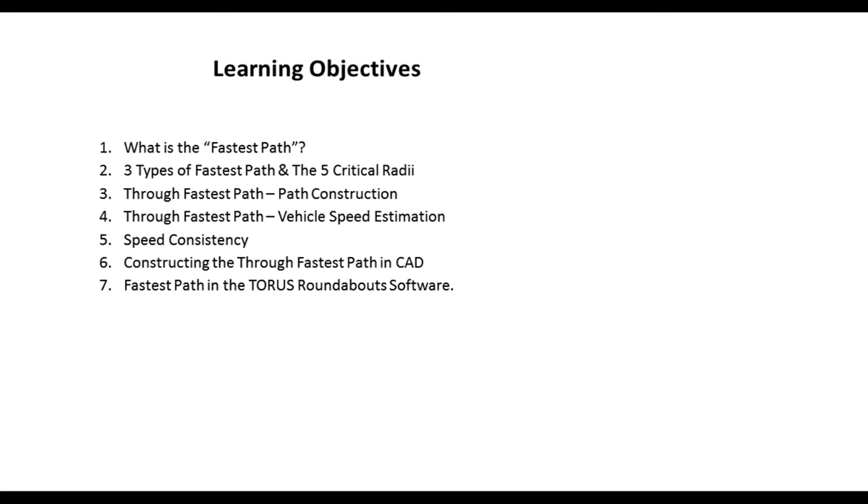At last, I will show you the workflow that engineers and designers use to create the fastest path and speeds manually step by step. Then my colleague is going to demonstrate the TORUS Roundabout design software in terms of creating the fastest path and calculating speeds.

Well-designed modern roundabouts usually bring advantages over intersections. For instance, improved capacity and safety for drivers, pedestrians, and cyclists. The geometry at entry, circulatory, and exit of roundabouts is important to assess the speeds at the roundabout. And the fastest path analysis estimates the speeds along the vehicle path.

The fastest path is the smoothest, flattest path possible for a single vehicle in the absence of other traffic and ignoring all lane markings. It's drawn for a vehicle passing through the entry, circulatory, and exit for all movements. The fastest path allowed by the geometry determines the negotiation speed for that particular movement into, through, and exiting the roundabout.

The design speed of the roundabout is also determined from the smallest radius along the fastest path, and usually the smallest radius occurs on the circulatory roadway when a vehicle turns to the left around the central island.

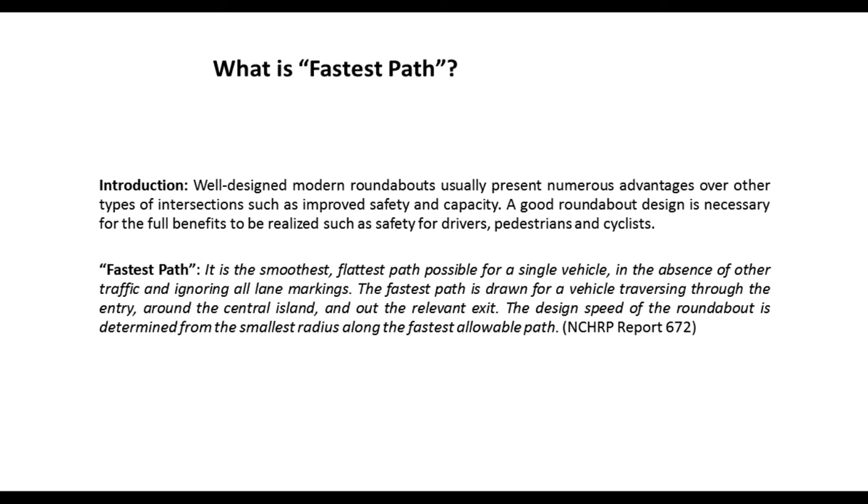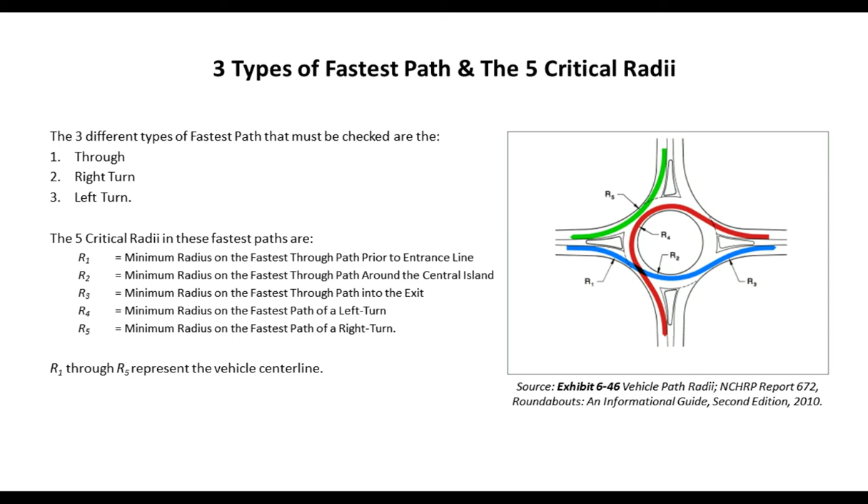This slide illustrates the three types of fastest paths, including through, right turn, and left turn movements. Also, the 5 critical radii that must be checked for each approach. R1 through R5 are minimum radii, which represent the vehicle center line in its fastest path through the roundabout.

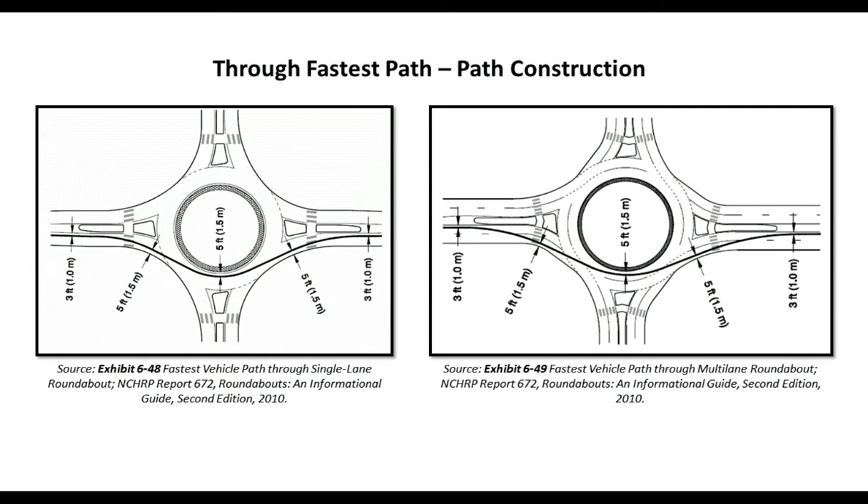The fastest paths must be drawn for all approaches and all movements, including left turn movements, which generally represent the slowest of the fastest paths, and also right turn movements, which may be faster than the through movements at some roundabouts.

For the through movements, the fastest path is a series of curves. To draw the path, a short tangent should be drawn between curves, which gives the driver time to turn the steering wheel. To measure the minimum radii, engineers use the curve template or replicate the path in CAD and try to define the radii based on their engineering judgment.

The entry path radius, R1, is a measure of deflection imposed on a vehicle before entering the roundabout. The construction of the fastest path should begin at least 165 feet or 50 meters before the entrance line or yield line by using the appropriate offset identified above.

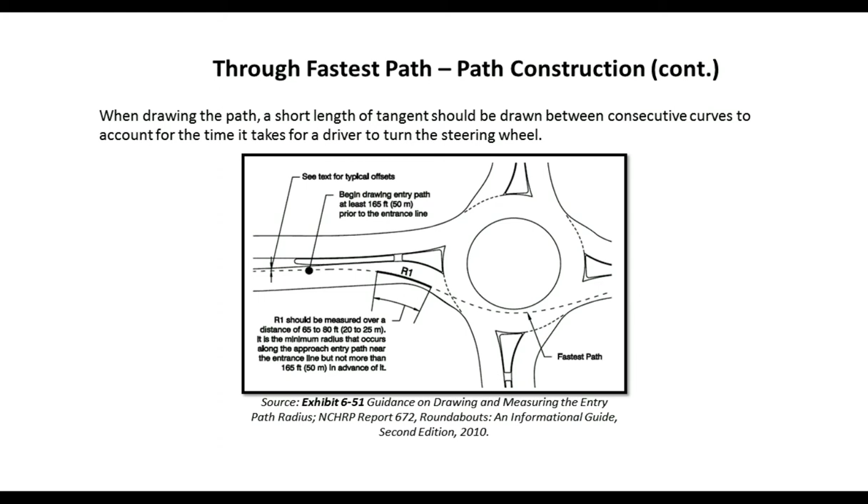For example, R1 should be measured at the smallest best fit circular curve, and the length of the arc should be at least 20 to 25 meters or 65 to 80 feet near the entrance line. After determining the radii, the relationship between travel speed and horizontal curvature is calculated with the following equations, which are useful for different superelevation values, positive and -2%.

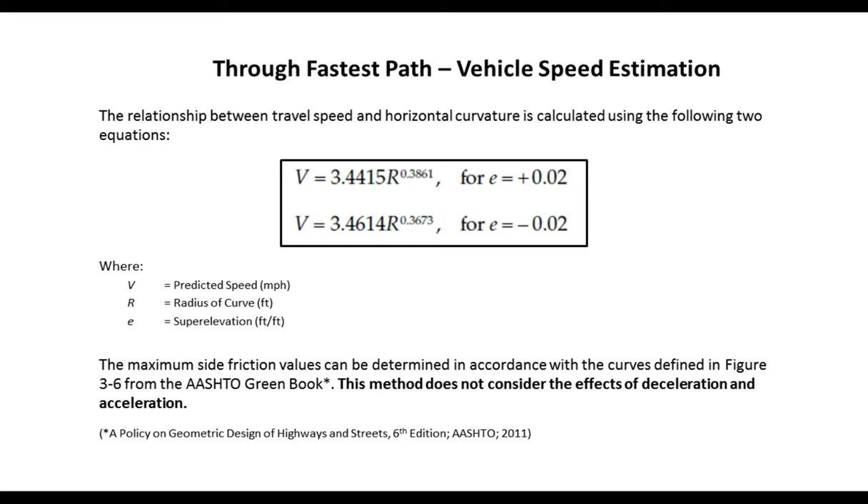As you can see, this method doesn't consider the effects of deceleration and acceleration. So for the cases where the path radii are large, it may overpredict speeds at the entry and exit. So to achieve better results for V1 and V3 calculation, I mean the entry and exit speed, two equations are recommended based on NCHRP 672.

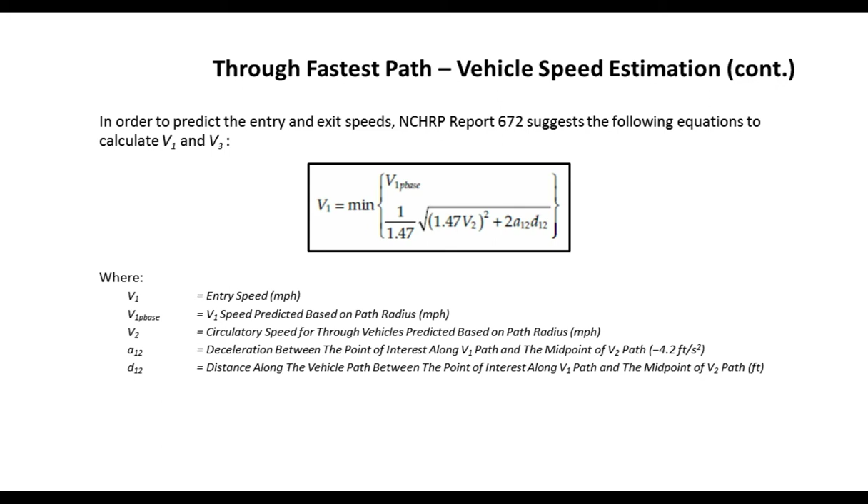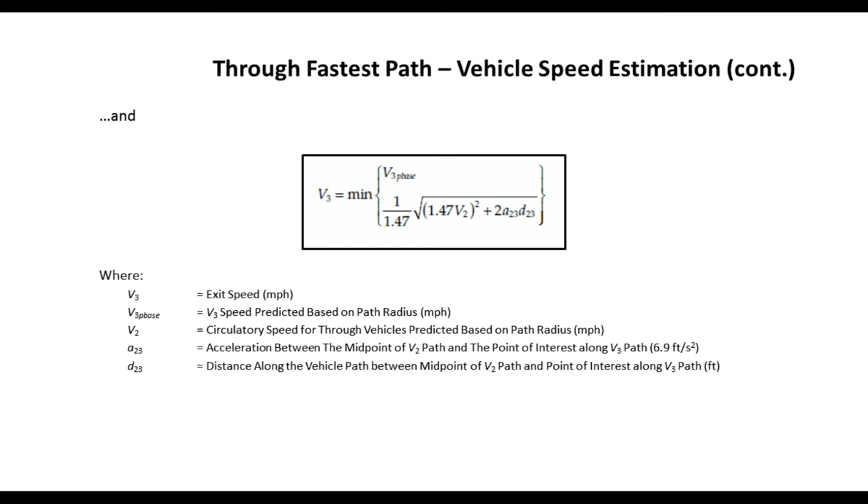In addition to achieving an appropriate design speed for the fastest movement, achieving consistent speed for all movements is another important objective for roundabout design. Speed consistency between the speeds of various movements can help to minimize the crash rates between conflicting traffic, so optimizing entry capacity. Relative speeds between conflicting traffic streams and between consecutive geometric elements should be minimized.

Based on NCHRP 672, the maximum speed differential between movements should be no more than approximately 10 to 15 mph or 15 to 25 km per hour. Also, based on FHWA, the value for R1 must be less than R2, and the value for R2 must be less than R3. This condition ensures that speeds will be reduced to the lowest level at the roundabout entry and will reduce the likelihood of loss of control crashes.

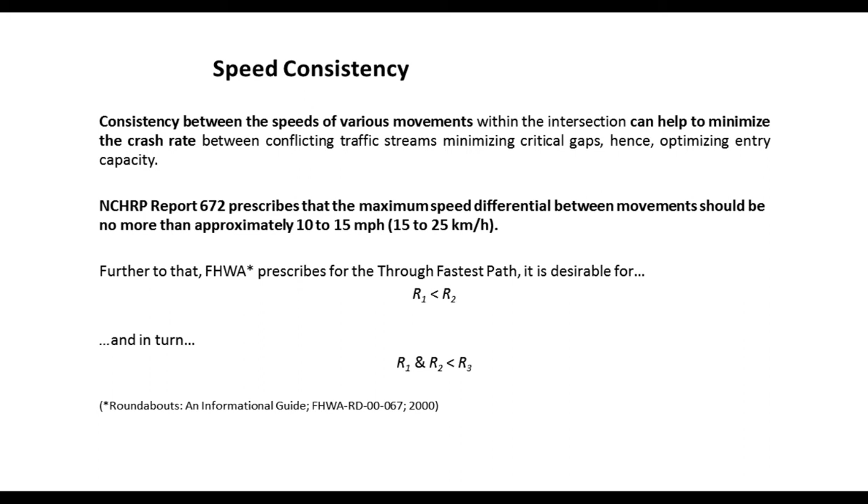Now, I would like to show you how we can create the fastest path and measure radii using CAD to calculate speed manually. Generally, the manual method has 4 main steps based on the Wisconsin Department of Transportation Roundabout Guide. First of all, we should create offsets for our roundabouts: 1 meter offsets from medians and 1.5 meters from the central island and corners, as you can see in this image.

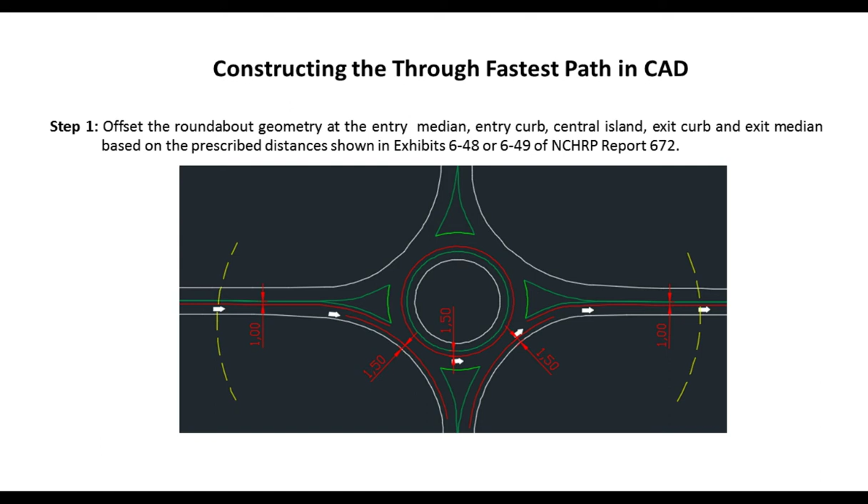Also, according to NCHRP 672, the fastest path must start at least 50 meters from the ICD. In the next step, we should draw a spline curve as shown in this slide for the through movement. To get a better result, we should select points A through C on the offset from the splitter island.

It is advisable to choose the first 2 points, I mean A and B, outside the 50 meter arc by about 8 meter intervals, and the last one, C, exactly on the 50 meter arc from the ICD. Next, we should choose point D close to the 1.5 meter offset from the entry curb. Then choose a location for the spline near the 1.5 meter offset from the central island.

After that, we need to select the position for point F close to the 1.5 meter offset from exit curb. For the last part, we should use the same approach which we used at the beginning of the vehicle path.

Choose point G on the exactly 50-meter distance from ICD and other 2 points after 50 meters by about 25 feet or 8-meter interval. Select another point which defines J in this image just upstream from the first point of the spline. To select the tangent direction from the drop-down menu as it is shown in this slide.

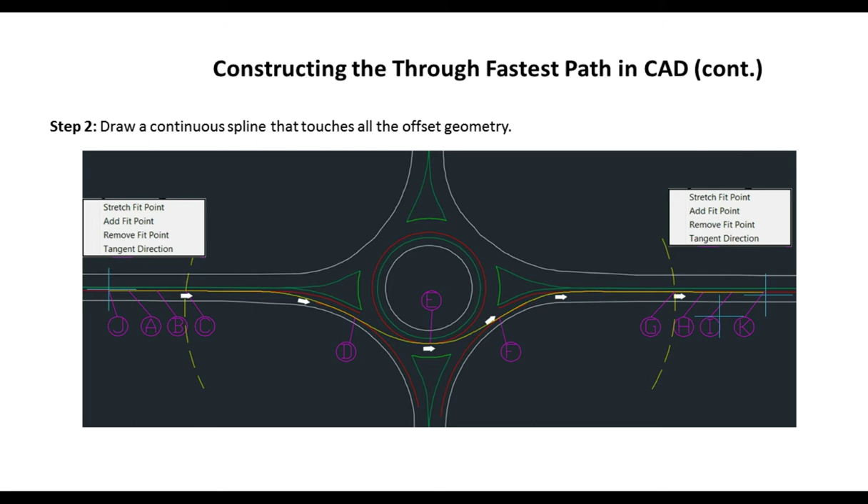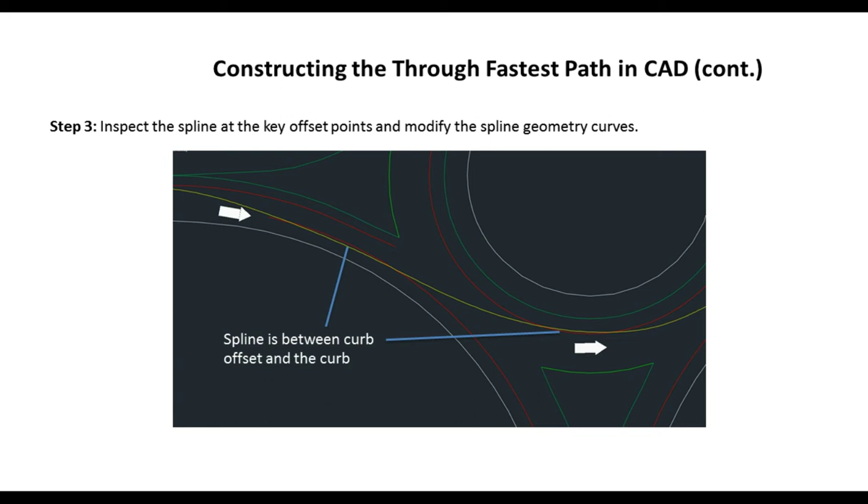This will force the spline to be tangent to the splitter island offset, and do the same thing for the end point by selecting another point named K in this picture. In the next step, we need to modify the spline, which was created in step 2, to see if it violates the offset. By zooming, we can visually inspect whether the spline curve violates the curb offset. If yes, we will need to modify it.

Once an acceptable spline is created, it is the time to measure our values by fitting arcs to the spline. Using nearest object snaps, fit an arc onto the spline at a point that appears to be the tightest portion of the spline. This should happen before the yield line and not more than 50 meters from the yield line. Then we should check the length of the arc, and if the arc is not 20 to 25 meters long, we should recreate it.

Then we can measure the radius of the arc. We must repeat this process to find R values for all movements. And after finding the values for R, we need to calculate speed for each R. Now I would like to show you these steps in CAD. So let me switch to the CAD.

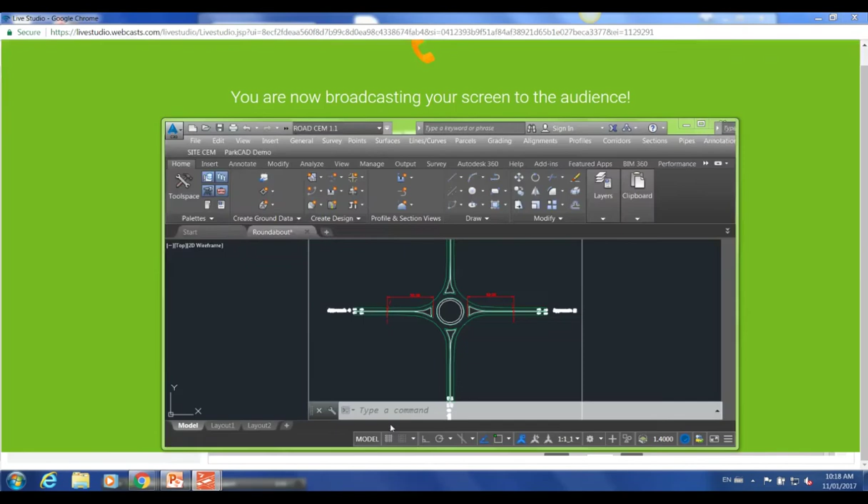Now at the moment, I would like to share my screen with you to show how we can create the fastest path in AutoCAD platform. It takes some seconds to show you. Thanks for being patient. I hope you can see my screen. If you have any trouble, let me know.

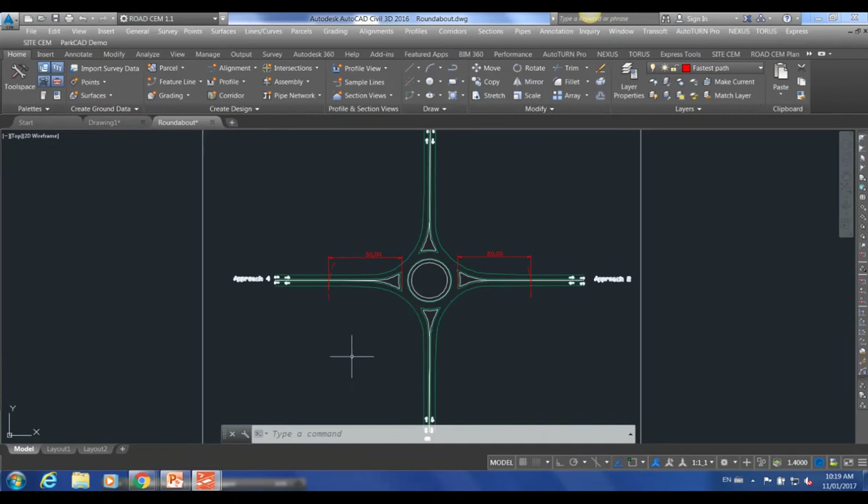Now, this is the CAD platform, and I would like to show you how we can create the fastest path and estimate the speed for this roundabout. This is a single lane roundabout with 4 legs, which I designed before in AutoCAD. And now I need to generate the through movement fastest path and estimate speed for entry, circulatory, and exit. First of all, I need to create the offset. 1 meter offset for splitter island, for entry and exit.

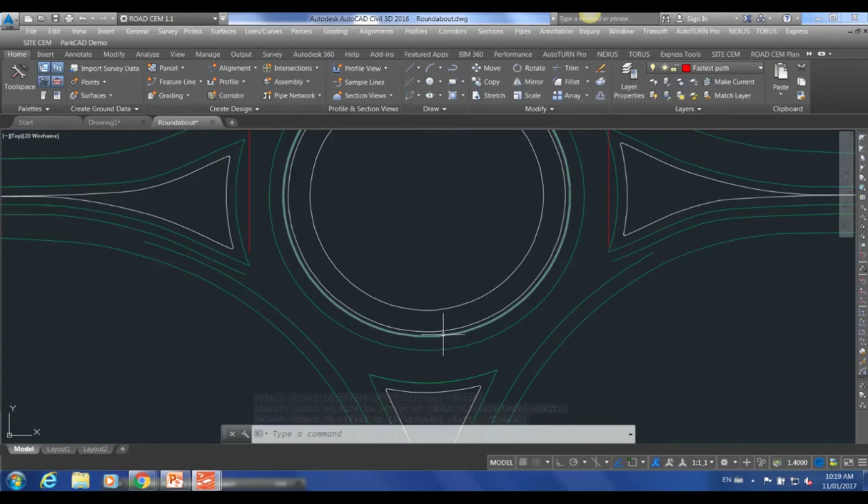And also 1.5 meters offset from the central island and also entry and exit corners according to NCHRP 672 methodologies. And also these 2 red arcs that we have here represent the 50-meter distance from ICD, which is important for us to create the fastest path and measure the radii, especially R1 and R3, I mean the entry radius and exit radius. And after that, I need to find the best fit spline to join all the offsets together to create the vehicle path.

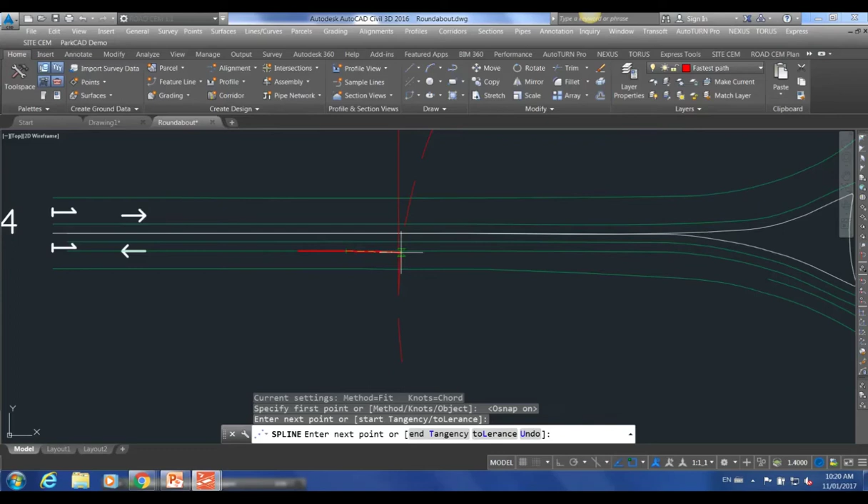Also, I need to turn on the snap and then select 1 point outside the 50-meter arc, the second point by 8-meter interval, and the third point exactly on the 50-meter. And then I need to continue along the offset. I try to select the segments very small, but as you know, this is a drawing example, and because of time, I just show you the methodology, but in a real drawing, we need to spend much time to get the best result.

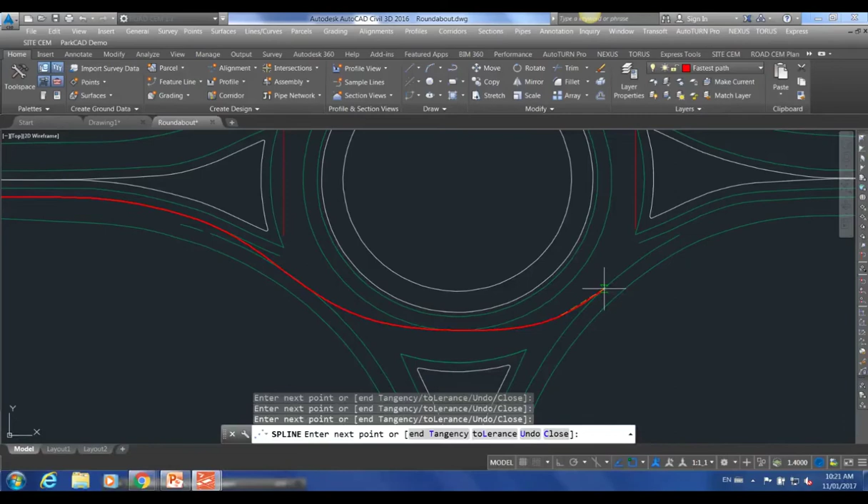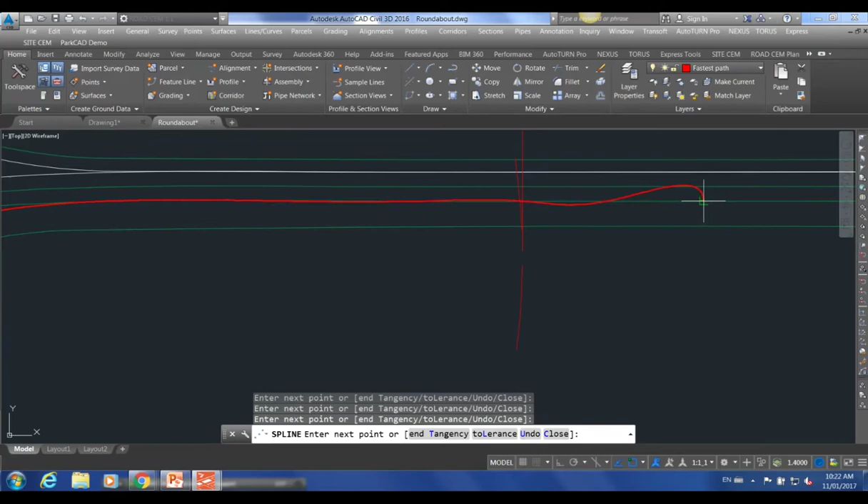In this case, I activate the nearest object snap to find a better spline. I try to show you the methodology that they recommended for fastest path creation and speed calculation. Again, for the end, I need to select 1 point exactly at a 50-meter distance from ICD and 2 points outside the 50-meter to be sure this is tangent to the splitter island. Now I create this spline.

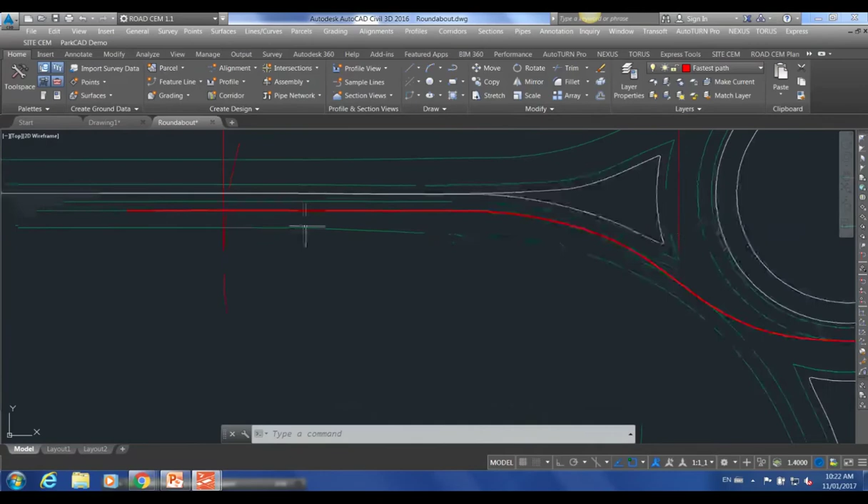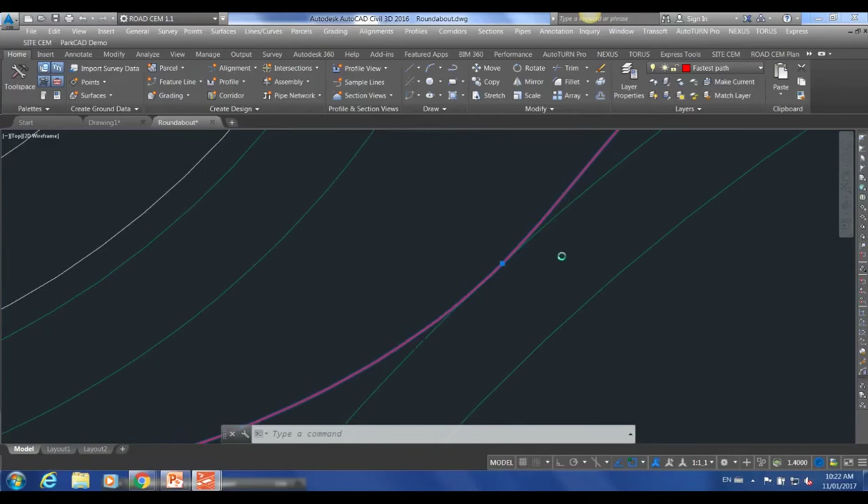In the next step, I need to go back and check the spline. And if the spline violates the offsets, I need to edit and modify it. I start from the beginning. For example, here we need to move the points. And again here, I need to move the points. And here we have a kink, so I'm going to modify it to get a better spline. And also for that point, you should go and replace it.

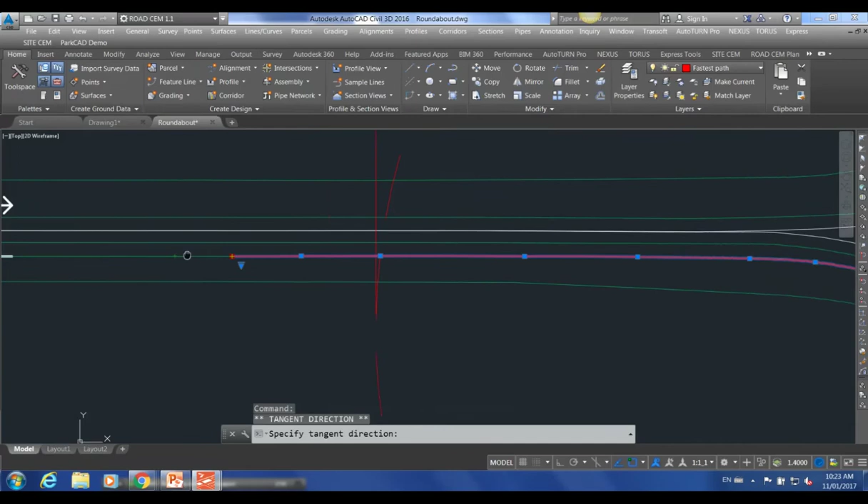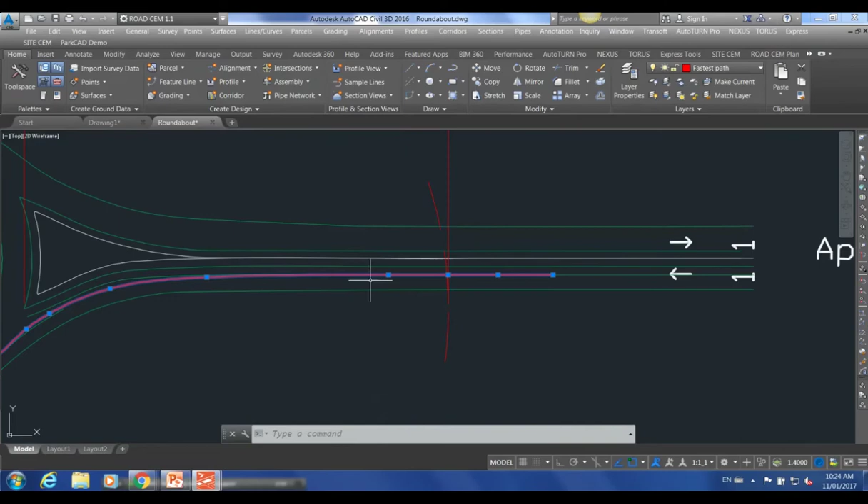Now I find the final spline, and I need to go back to the first point, select the spline, choose the tangent direction from the drop-down box, and just select 1 point upstream from the first point and do the same thing for the end point. According to Wisconsin DOT recommendation, this will force the spline to be tangent to the splitter island offset. And after finding the final spline, I need to create the arcs to find the best fit arcs for entry, circulatory, and exit.

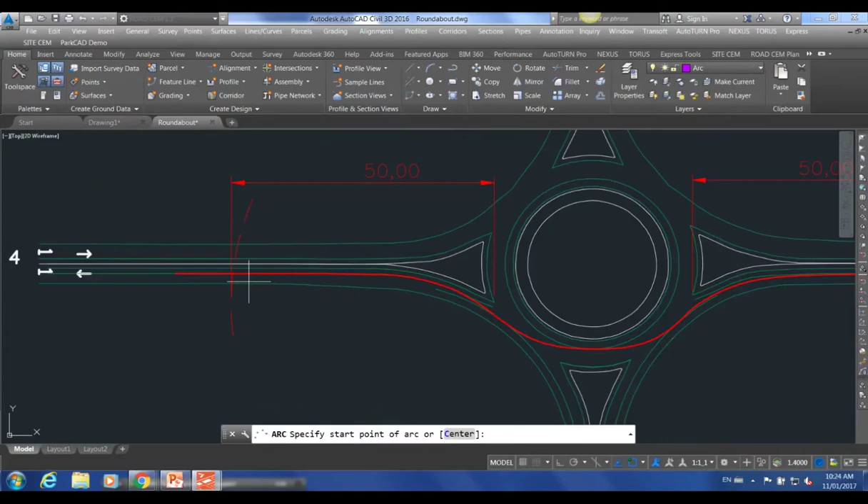Then I just change my layer and try to define an arc. Just pay attention about defining the arc for entry and exit. You should go and define this arc between 50-meter arcs and entrance line. So I try to find the best fit arc, again by choosing the near option of snap.

And after that, I need to just become sure about the length arc. And if the length arc is between 20 and 25 meters, it is acceptable. If not, I need to go back and recreate the arc again. As you can see here, the length of arc is about 24 meters, so it's acceptable for us.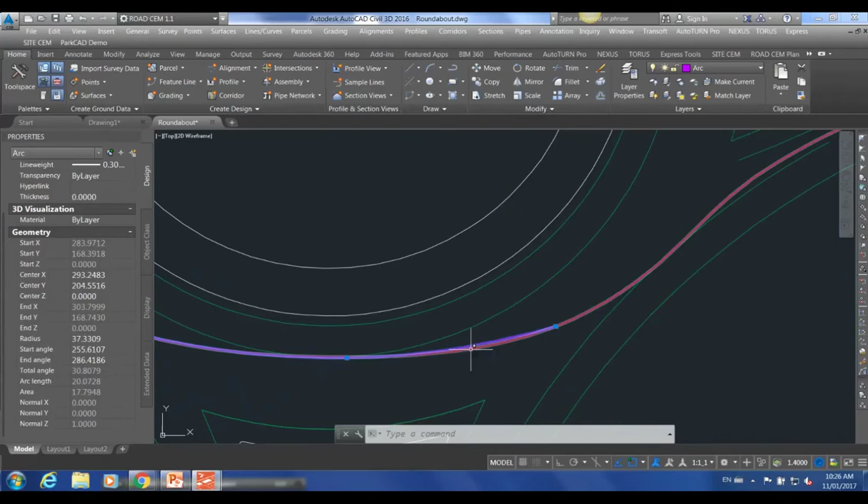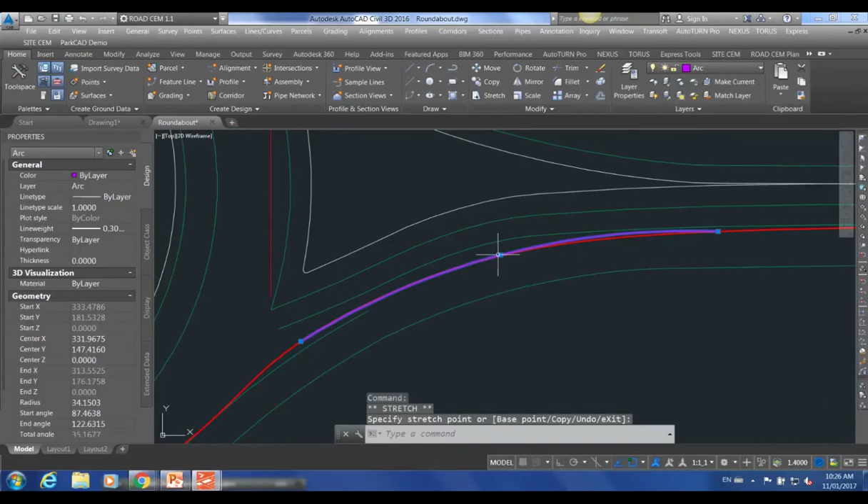And I'm going to do the same thing for the central island too. And check the length of the arc. So it is small, not long enough. So I need to go and edit. And now I think it's fine. Yeah, it's 20 meters. And then for the exit, I need to go and define the arc again. And check the length of the arc to become sure it's acceptable or not.

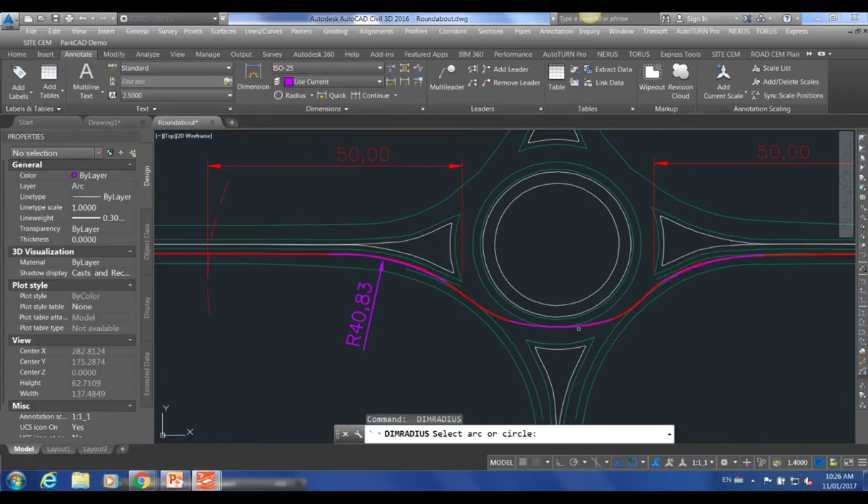So after finding the arc, we should go and measure the radii. So I just create a dimension. And here you can have all the radii values. And after that, you need to go and calculate the speed for entry, circulatory, and exit manually. And then you need to go and see if the speed consistency condition is matched with our design or not.

At this moment, I would like to ask my colleague to continue to show you the way that TORUS creates the fastest path, estimates speed, and checks the speed consistency in comparison with the traditional method.

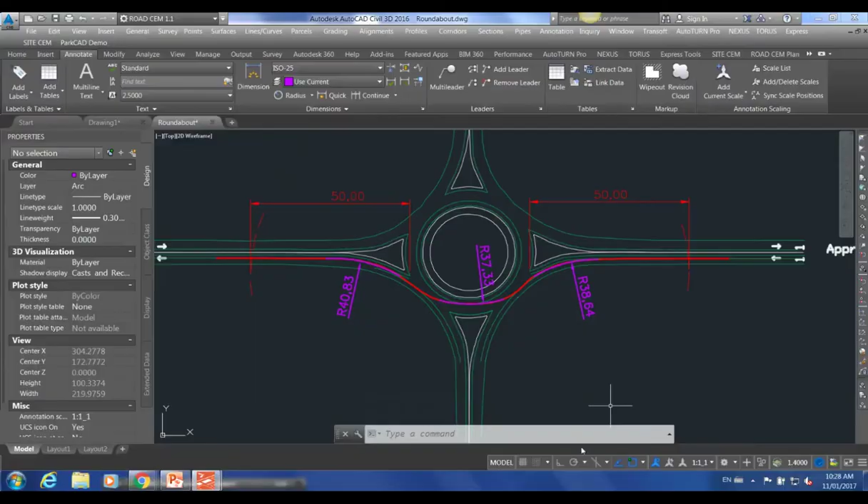Thank you, Anna. Thank you, Anna. So what we'll do here is just kind of set up a little bit here.

Now, part of the reason why we wanted to show the methodology manually is just to give you sort of a way to be able to compare what I'll end up doing ultimately when you see on screen. Right now, I'm just setting things up, if you'll bear with me.

Okay. Hopefully you guys can see my screen now. Okay, perfect. So what I'll do is let's take you into AutoCAD. In so much as I'm working in AutoCAD with this product, this works the same way in MicroStation as well for any of you folks that might be working alongside the DOTs.

Now, I'm not going to go too far into this software. It takes an hour and a half to actually demonstrate this. So let's focus solely on what we've been talking about so far, being able to approximate what your fastest through path might be for your specific design, as well as going through the motions of actually calculating your fastest path. So you can see on screen here, just a generic design, single lane. You can also see along the top the ribbon for the TORUS software.

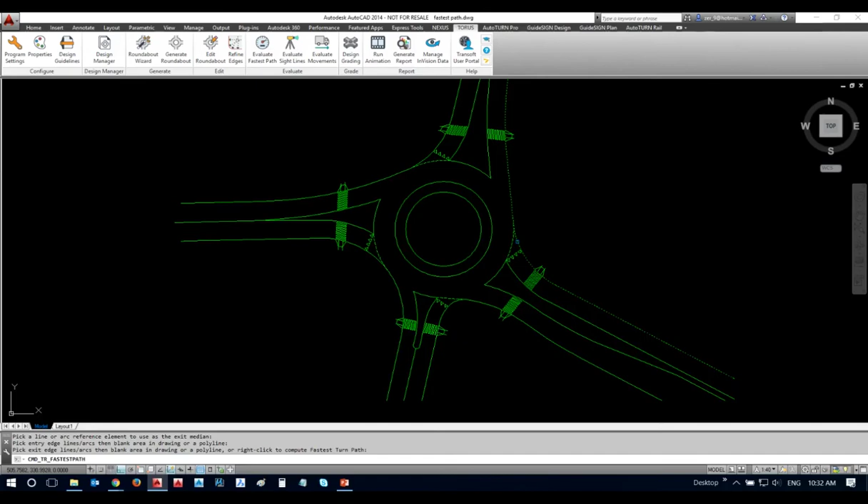Now it's asking me to pick a line or arc element for the entry median. Let's take a look at the through path moving westbound. So I'll click on the east median here. Now it's asking me for the exit median. Let's do that over here in the west. And then it's asking to pick an entry edge, which would be on this side here. Last but not least, it's asking for the exit edge.

So I'll click here. And what it does then is it goes and approximates your fastest path, as well as goes ahead and calculates the speeds based off of the approximated radii. So you can see everything up here. You can see that the key offsets have been taken directly from NCHRP Report 672. You saw that earlier in the slides. With those key offsets, the software's gone ahead and approximated this path, and it's calculated then for V1, V2, V3.

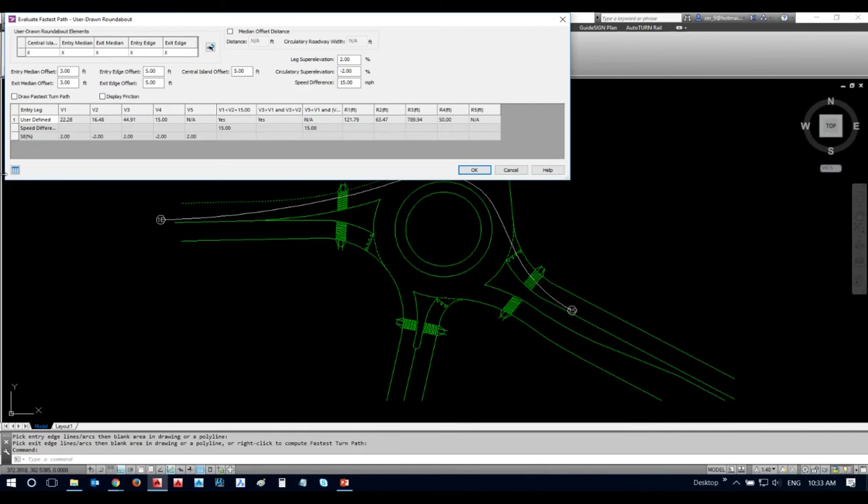But also, let's take a look at, more importantly, the speed consistency here. For V1 and V2, V1 is less than V2 plus 15 miles an hour. And V3 is greater than V1, as it is greater than V2. And if you're curious in regards to what TORUS had come up with for the R1, R2, R3, you can see them noted here. And if everything's fine here, you can go ahead and insert this as a report in your drawing, having all that key information.

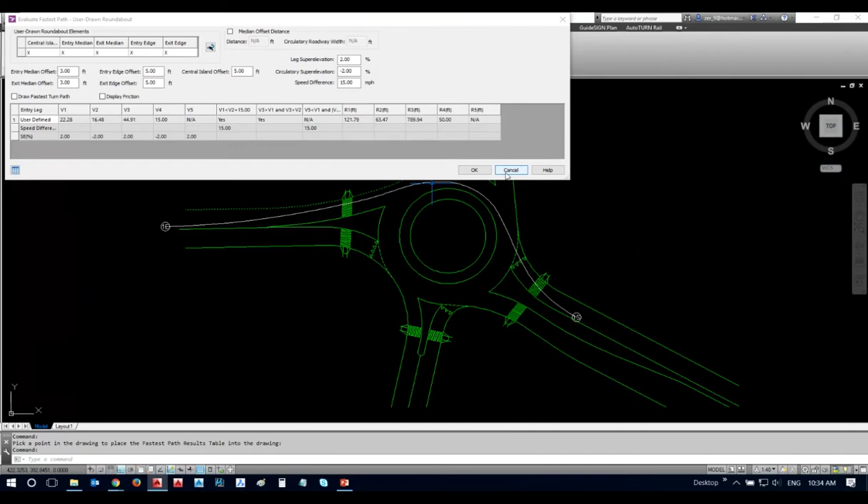Right? Now, obviously, this one seems to be a good design, or at the very least, it produced good results. A user in this case, if they had values that are above acceptable ranges, you'd go through the motions using either AutoCAD or MicroStation to manually edit the edges, maybe change some of the entry angles potentially. But then after everything's said and done, he can go back and use this tool to quickly recalculate what the change in the fastest path would be.

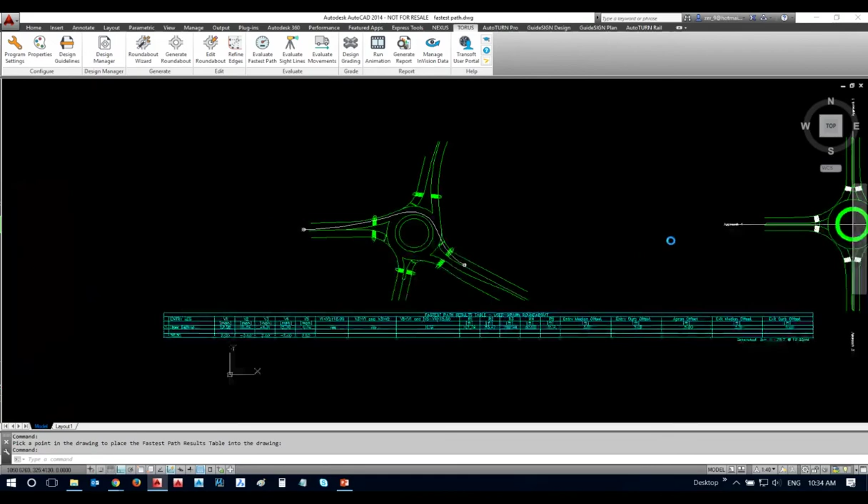So this is how it's done manually. Again, it's for anybody that might have started out without the TORUS software in the beginning, or for those plan checkers that might be just checking for the safety performance of what they might be peer reviewing at the time. Let's take a look at what the case would be then if a user had used the TORUS Roundabout software to generate their design and would be going through the motions of evaluating the fastest path.

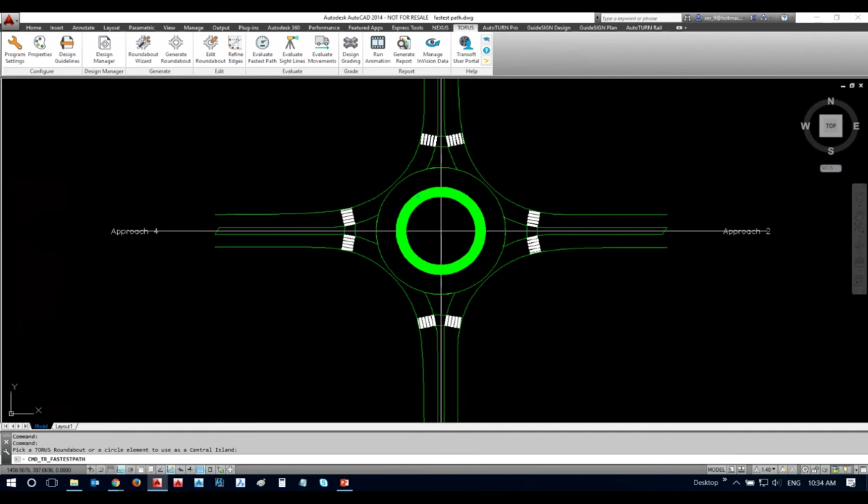Now, for this case, maybe I'm the peer reviewer, the plan checker, and I've gotten this from one of my junior engineers, and I'd want to go about checking the fastest path for this particular design. What I can do, once again, is just simply click on Evaluate Fastest Path, and then click on the TORUS design itself. And then you can quickly see that it approximates the fastest path for the design for all approaches, and then goes ahead and calculates the different velocities as well as checks for the speed consistency. Okay. So it's using these key offsets once again.

I know as time's gone by, we're starting to hear that different locales now are coming up with supplements to NCHRP Report 672. They're starting to make design guidelines their own for their particular state or jurisdiction. So if there were any need to make any of those changes to these offsets, then there is an opportunity for a user to do that here.

Besides the V1, V2, V3, we do also calculate alternate speeds for the entry as well as the exit. These take into account the actual values for acceleration and deceleration as well. So it's another check against what you would customarily have calculated out for the fastest path.

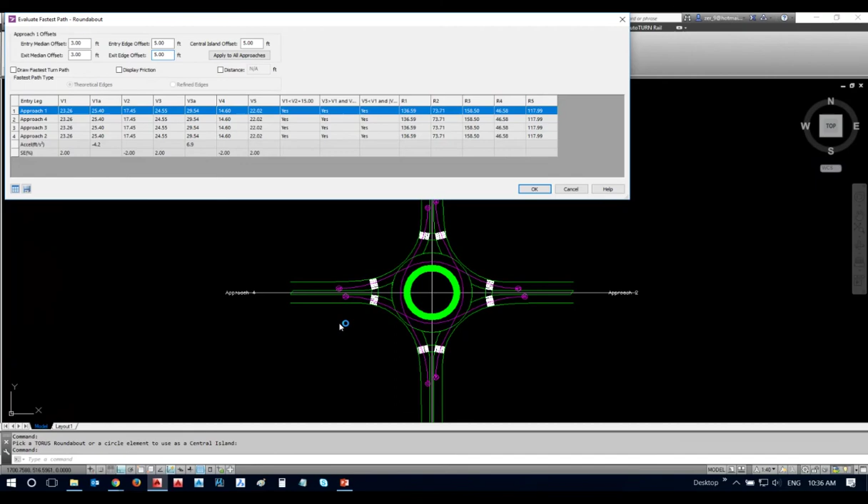Now, I'm sure there's going to be some people that ask about this. I'll keep it high level. They're going to ask, how exactly is this software approximating this path? How different would this be from what's prescribed by WisDOT's method? I'm not going to go into too much detail, but give you a high level of what it's actually doing. So let me just close this for now. And let's take a look at what's produced here.

And let's maybe concentrate on this fastest path that's moving west to east. So what the software does first off is, just like what Hannah demonstrated, it offsets geometry based off of the offsets that you have set for the software. In this case, we're just taking the default offsets from Report 672. And then what it does as a first pass is that it creates tangential arcs in the three regions: at entry, through the circulatory lane, and then at the exit.

Now these are sort of butted up one next to the other. It produces kinking at the intersections of these radii. What's done then is there's a minor reduction in the size of those radii, and the reason why is that it needs to put in a transition between those two arcs. And then the geometry that's used to join those transitions are splines.

So we had originally done this as a model during the initial testing of the software with some of the engineers that were working with us. And we were finding that, at least as we refined the process, we were starting to come to something that was being output that was fairly close to what these experts were coming up with manually. So with that said, it's not,

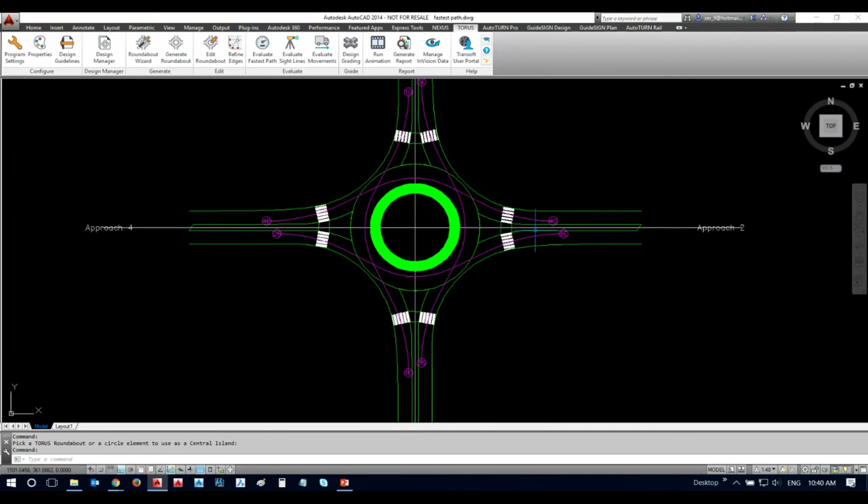So one thing that we did was we made the analysis dynamic for the TORUS generated roundabout designs. And I'll show you what I mean here. Maybe we want to reduce some of these speeds here, which would necessitate me to edit the geometry that you see in front of you right now. And then maybe I might want to go into one of these legs. The controls themselves are fairly parametric. I can go in there and maybe change some of these radii. But

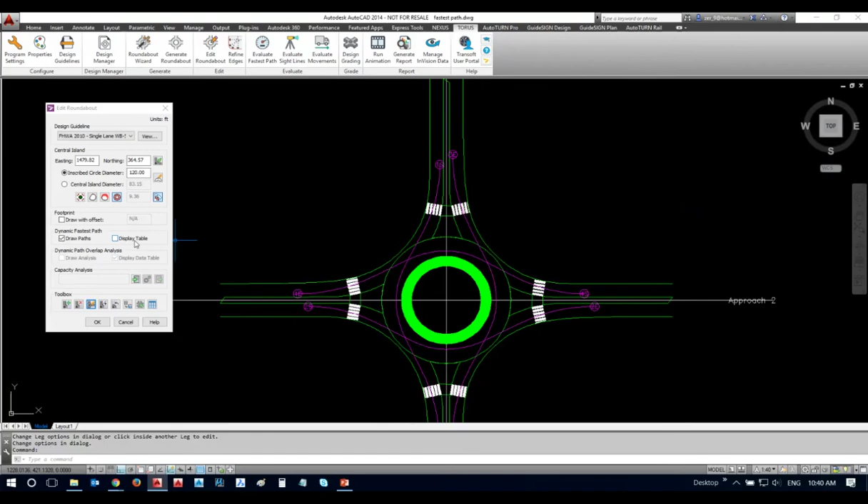what I'd want to do maybe is do a heads-up design. And insomuch as I've got the fastest paths already being displayed, I'll go ahead and also bring up my calculations here. And just to show things off, maybe you may not do this. Well, actually, maybe at the very beginning, you may be still up in the air in regards to where the center of your design might be, given the proximity to the edges of your right-of-way, potentially.

So what a user can potentially do here is move the central island wholesale at this point. And what I'm doing is just moving it around. You probably go through these steps still trying to figure out exactly where the center of this design would be. But you can see that as I'm doing this, my fastest path is being regenerated on the fly, as well as the calculations themselves being calculated in real time.

So being dynamic, you have less of that iterative grind that I'm sure any of the veteran designers have gone through, where you're calculating things, finding out speeds aren't where they should be, erasing everything, or maybe just editing some things, and then doing the calculation once again, and then finding out it might not be there yet. Sort of those two steps forward, one step back. We go a long way towards eliminating that grind from the workflow.

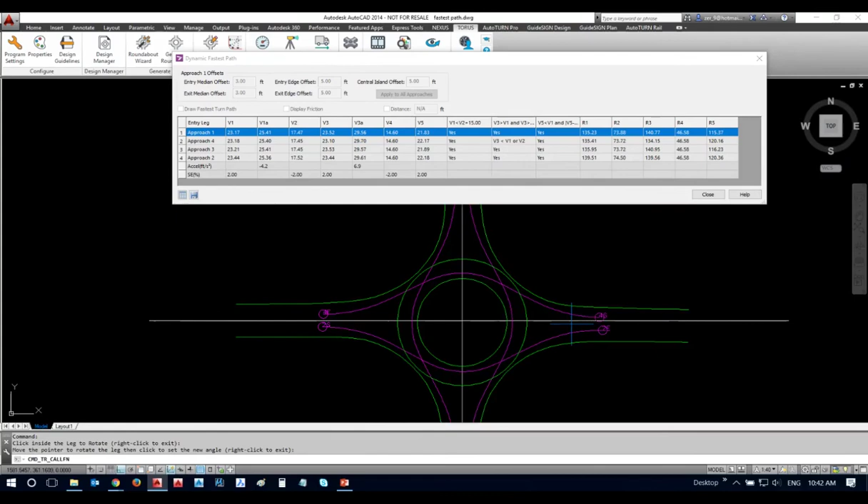After everything's said and done, again, I could go in here and make changes potentially to the angles of these legs. Again, you'll have the values recalculated, as well as my speed consistency being rechecked. I go in there potentially putting in greater radii, changing the value for my ICD, making it bigger, potentially reducing it depending on what my speeds are telling me.

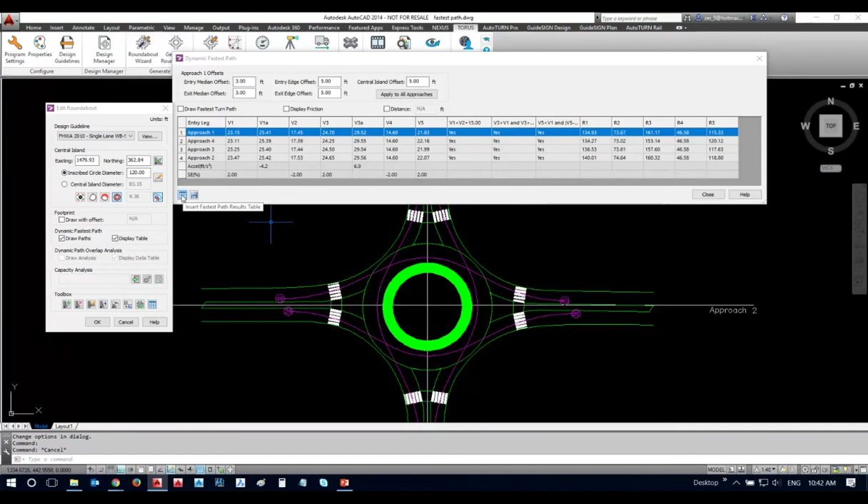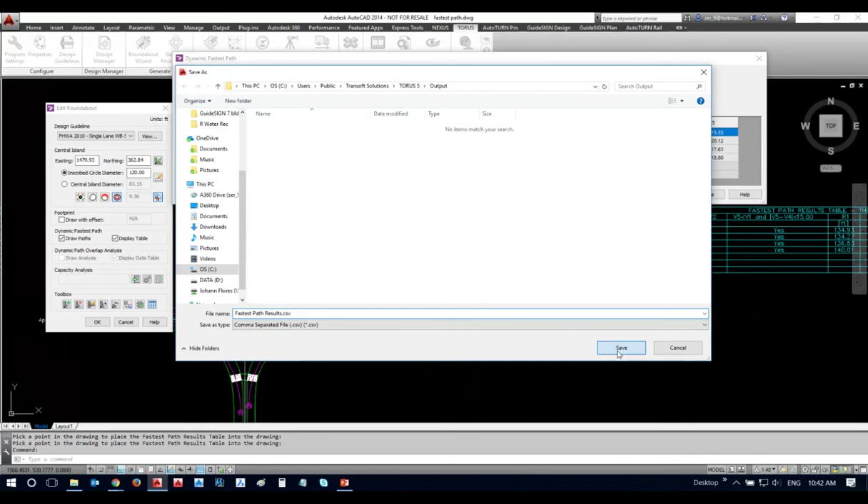After everything's said and done, though, we can go ahead and insert this speed report into the drawing, which has all the things that we need for our design report. We can also export this as a CSV file if you wanted to take it into an Excel environment to potentially do further work in. But hopefully that gives you sort of a gist of how fastest path is handled through the software, as well as some of the efficiency boosts that you can get from using the software.

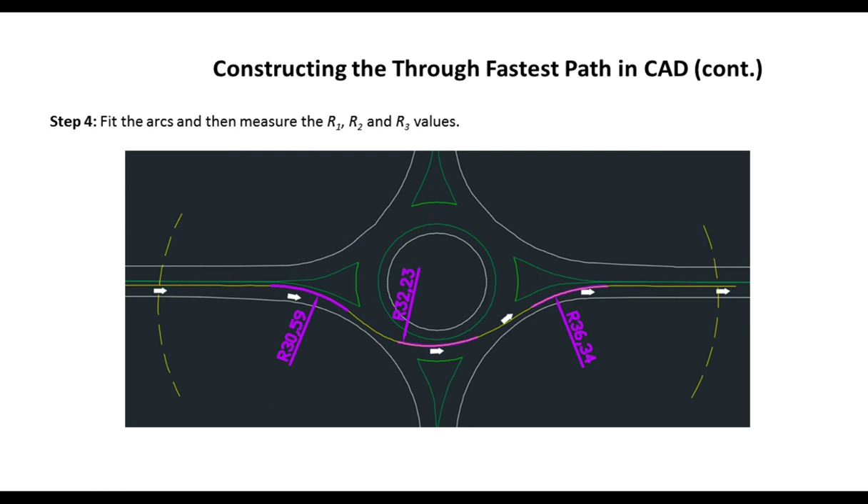What is the largest vehicles per hour for this design? Okay, I'll go ahead and field that one. So this question was coming in from Robert Hinton. Thank you very much for stopping by, and it's a good question. I think looking back at when this question popped up during the presentation, this was around the time that Hannah was talking through, I think, the key offsets for both single and multi-lane roundabouts.

Now, this question here, what's the largest vehicles per hour for this design? That example was coming from report 672 as a generic example, just in focus of the performance checking aspect. It comes at the time where it's talking about the methodology for approximation of these check geometries. So it was sort of disconnected from any sort of traffic study as to what the capacity would be for that particular design. What I can suggest is I'll refer you back to NCHRP report 672.

There is a section there that talks about capacity. It talks through the kind of numbers that would necessitate you going from a single to a double lane roundabout or potentially more. That would be the best place to search for those answers. But getting back to answering your question, what you saw on screen was really a generic example, so it didn't have any numbers behind it for traffic calming.